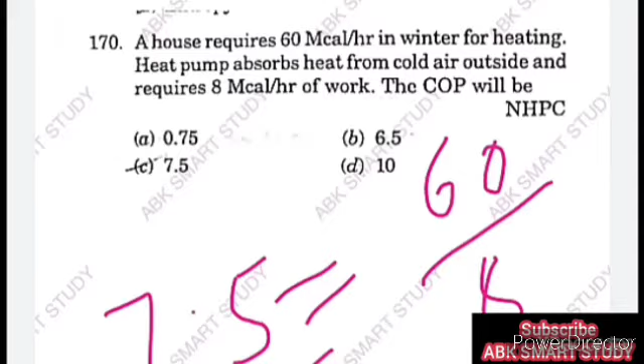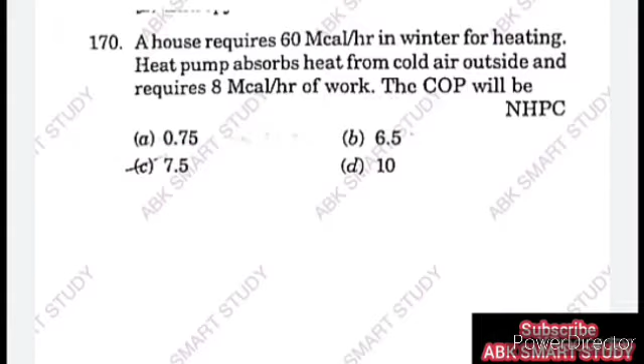So COP is equal to 60 upon 8, which is equal to 7.5. So if the heat pump absorbs heat from cold air outside and requires 8 megacalorie of work, then COP will be 7.5. So here option C, that is 7.5, is the correct answer. Next question.

Next question depends on the previous problem, that is if the house in the above problem is to be cooled and heat requirement of house is same and work to be done is also 8 megacalorie per hour, then COP will be. So this question was asked in BHEL exam. So this is an important question which depends on the previous question.

So in the previous question Q is given as 60 megacalorie per hour, but here heat requirement of house is same and work to be done is also 8 megacalorie per hour. So total heat requirement is equal to 60 minus 8, equal to 52 megacalorie. So COP will be equal to Q upon W, but here Q is 52. So 52 divided by 8 is equal to 6.5.

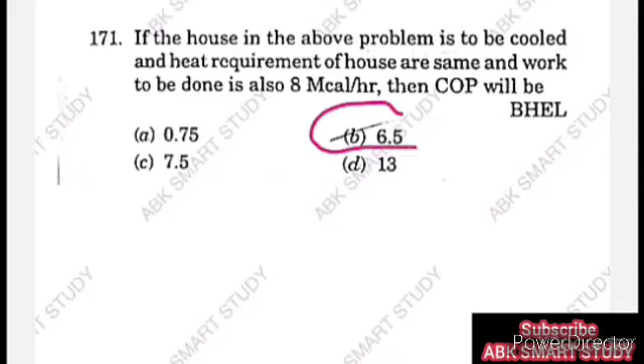So if the house in the above problem is to be cooled and heat requirement of house is same and work to be done is also 8 megacalorie per hour, then COP will be 6.5, which is given in option B. So here option B, 6.5, is the correct answer. Next question.

The equation TdS is equal to dU plus PdV can be applied to processes which are. So to which process is this equation applied? Options are A, only reversible process, option B, only irreversible process, option C, both reversible or irreversible process, and option D, none of the above.

So we know the equation TdS is equal to dU plus PdV is applied to both reversible and irreversible processes. So here option C, the equation TdS is equal to dU plus PdV is applied to reversible or irreversible process. So here option C is the correct answer. Next question.

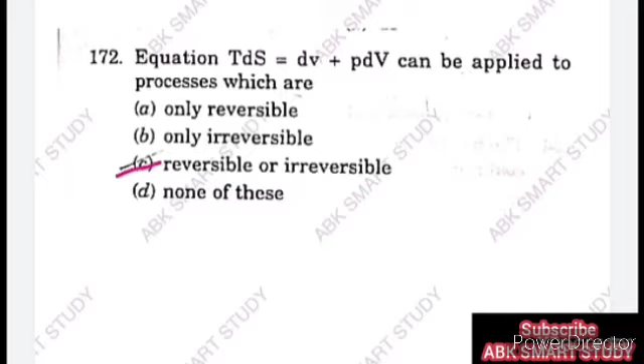So here availability function is expressed as, options are A, phi is equal to u plus p0v minus t0s, option B, phi is equal to du plus p0dv minus t0ds, option C, phi is equal to u plus p0dv plus t0ds, and option D, phi is equal to u plus p0v plus t0s.

So availability function is expressed as phi is equal to u plus p0v minus t0s, which is given in option A. So availability function is expressed in option A, that is phi is equal to u plus p0v minus t0s. So here option A is the correct answer. Next question.

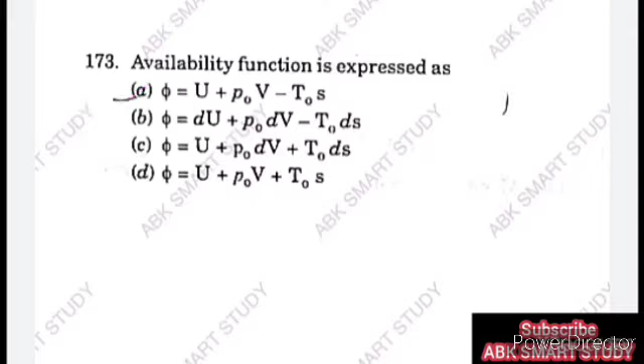Here, a triple point. So triple point means, options are: A, ice on heating becomes superheated vapor; option B, solid, liquid and vapor coexist; option C, ice occupies maximum specific volume; and option D, liquid water and dry saturated steam coexist.

So we know at triple point solid, liquid and vapor, all three coexist. So here option B, at triple point solid, liquid and vapor coexist. So option B is the correct answer. Next question.

With increase in pressure, boiling point of water. So with increase in pressure, the boiling point of water is what? Option A, increases and enthalpy of evaporation increases. Option B, increases and enthalpy of evaporation decreases. Option C, decreases and enthalpy of evaporation increases, and option D, none of the above.

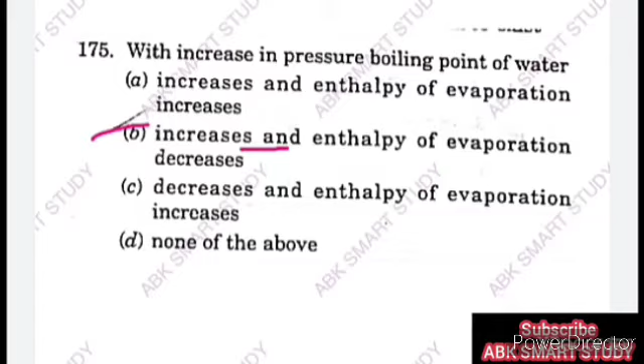So with increase in pressure, the boiling point of water increases, its temperature increases and enthalpy of evaporation decreases, which is given in option B. So option B is the correct answer: with increase in pressure, its temperature increases and enthalpy of evaporation decreases. So option B is the correct answer. Next question.

With increase in pressure for water, enthalpy of dry saturated steam. So in the previous problem water's enthalpy was given, and now here for dry saturated steam. So with increase in pressure for water, enthalpy of dry saturated steam decreases. So here option B is the correct answer, that is with increase in pressure for water, enthalpy of dry saturated steam decreases. So option B is the correct answer. Next question.

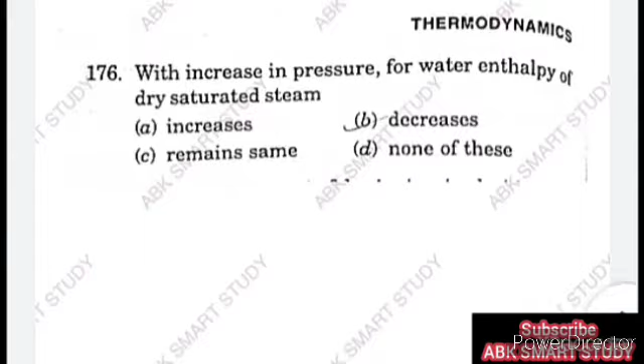If a certain amount of dry ice is mixed with the same amount of water at 80 degrees Celsius, then the final temperature of mixture will be 0 degrees Celsius. So if a certain amount of dry ice is mixed with the same amount of water at 80 degrees Celsius, then the final temperature of mixture becomes 0, which is given in option B. So here option B is the correct answer. Next question.

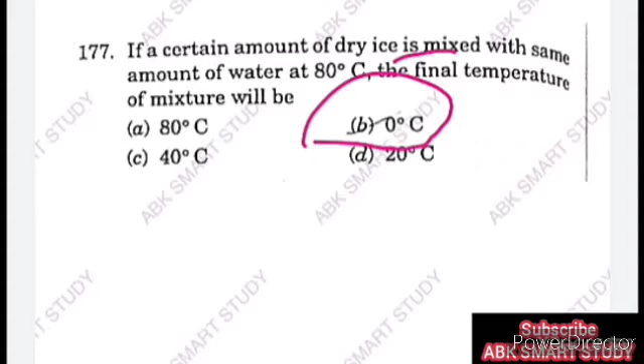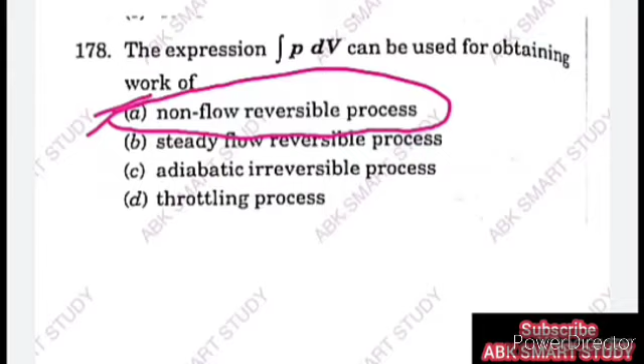So here option A, that is non-flow reversible process, is the correct answer. That is, the expression integration of P into dV can be used for obtaining work of a non-flow reversible process. So option A is the correct answer. Next question.

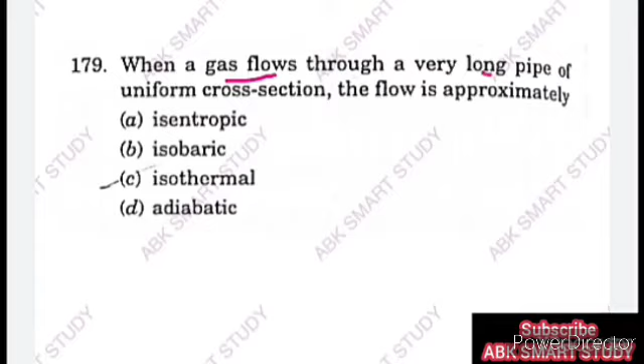When a gas flows through a very long pipe of uniform cross section, then the flow is approximately what? Option A isentropic, option B isobaric, option C isothermal, and option D adiabatic. When a gas flows through a long pipe with uniform cross section, the flow is called isothermal, that is constant temperature flow. So here option C, isothermal, is the correct answer. Next question.

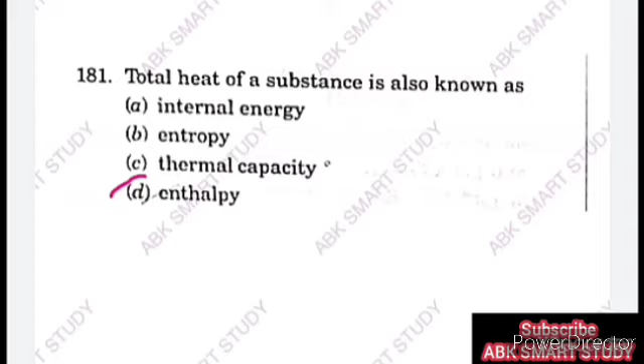The total heat of a substance is also known as: option A, internal energy; option B, entropy; option C, thermal capacity; and option D, enthalpy. So we know total heat of any substance is always equal to H, that is enthalpy, which is given in option D. So here option D is the correct answer. That is, total heat of a substance is called enthalpy. Next question.

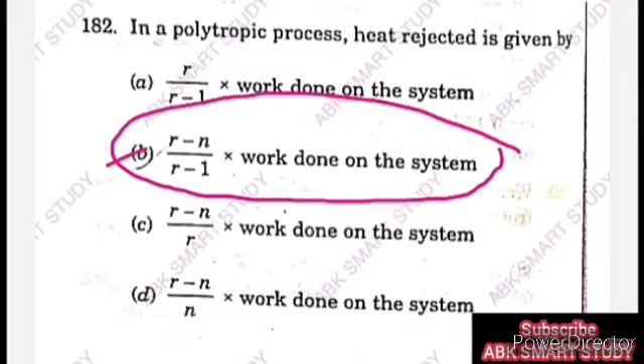So we know in a polytropic process heat rejected is given by R minus N upon R minus 1 into work done on the system, which is given in option B, that is R minus N divided by R minus 1 into work done on the system. So here option B is the correct answer. Next question.

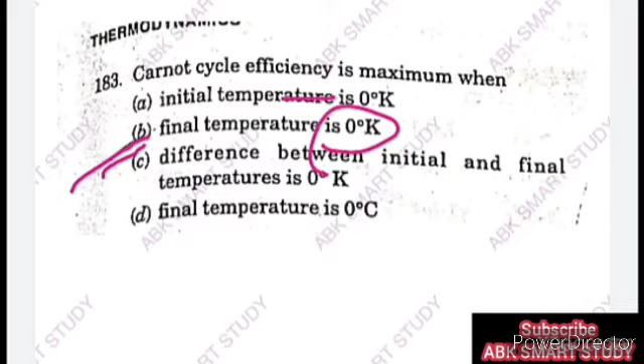So we know Carnot cycle efficiency is equal to T1 minus T2 upon T1. Here T1 is initial temperature and T2 is final temperature. When we put T2 equal to 0, efficiency is equal to T1 minus 0 upon T1, equal to 100%. That is, efficiency becomes maximum when final temperature T2 becomes 0 degree Kelvin. So here option B, final temperature is 0 degree Kelvin, is the correct answer. Next question.

So we know according to Clausius statement, heat flows from hot substance to cold substance unaided, means without the aid of any external work. Heat always flows from hot body to cold body, which the Clausius statement states. So here option B, heat flows from hot substance to cold substance unaided, is the correct answer. Next question.

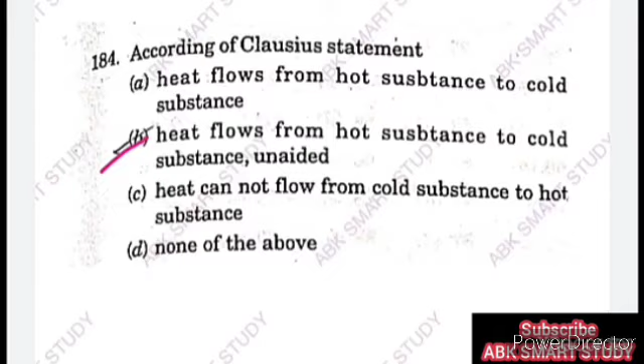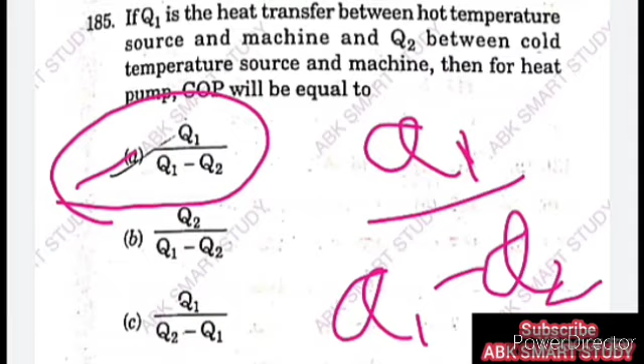So now in case of refrigeration machine, COP will be. Options are: Q2 divided by Q1 minus Q2. Option B, Q1 divided by Q1 minus Q2, is the COP of heat pump, so this is wrong. Option C is the efficiency of heat engine, so this is also wrong, and option D is also wrong.

So COP of refrigerator machine is equal to amount of heat absorbed divided by work done, given by Q2 divided by Q1 minus Q2, which is given in option A. So here option A is the correct answer. That is, Q2 divided by Q1 minus Q2 is the COP of refrigerator machine. Next question.

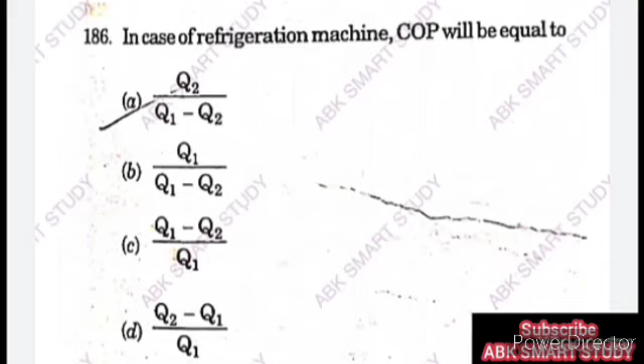Change in entropy for a heat transfer process is given by. Option A, delta H into T. Option B, delta H upon T. Option C, delta H upon delta T. And option D, T upon delta H.

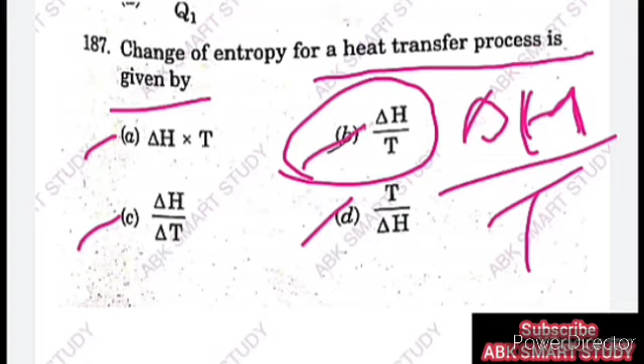So we know it is equal to delta H, that is change in enthalpy, per unit temperature, which expresses the entropy change of the process. This is given in option B, delta H upon T. So change of entropy is delta H by T, and option B is the correct answer. Next question.

A perpetual motion machine is... So what is meant by perpetual motion? Option A, it is a thermodynamic machine. Option B, it is a non-thermodynamic machine. Option C, it is a hypothetical machine. And option D, it is a hypothetical machine whose operation would violate the laws of thermodynamics.

So we know a perpetual motion machine is a hypothetical machine whose operation would violate the laws of thermodynamics. So option D: a perpetual motion machine is a hypothetical machine whose operation would violate the laws of thermodynamics. So here option D is the correct answer. Next question.

The first law of thermodynamics is the law of... Option A, the law of conservation of mass. Option B, the law of conservation of energy. Option C, the law of conservation of momentum. And option D, the law of conservation of heat.

So we know that the first law states that energy cannot be created and cannot be destroyed, but it can be transferred from one form to another. So it depends only on conservation of energy. The first law of thermodynamics is the law of conservation of energy, which is given in option B. So here option B is the correct answer. Next question.

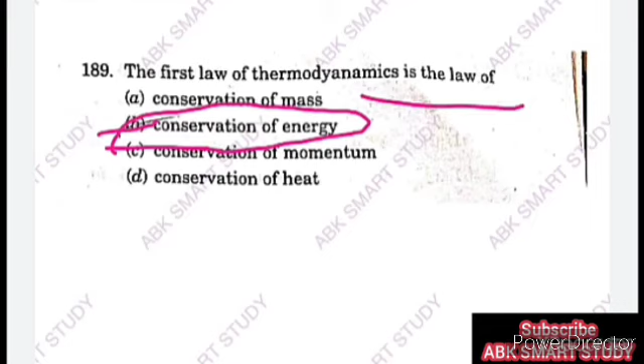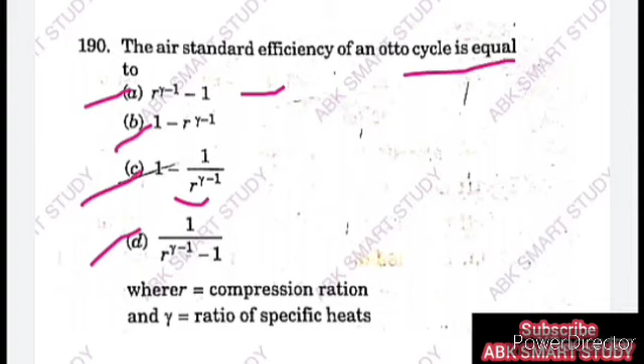The air standard efficiency of Otto cycle is equal to... Option A, R raised to gamma minus 1, minus 1. Option B, 1 minus R raised to gamma minus 1. Option C, 1 minus 1 upon R raised to gamma minus 1. And option D, 1 upon R raised to gamma minus 1, minus 1. Where R is the compression ratio and gamma is the ratio of specific heats, that is Cp upon Cv.

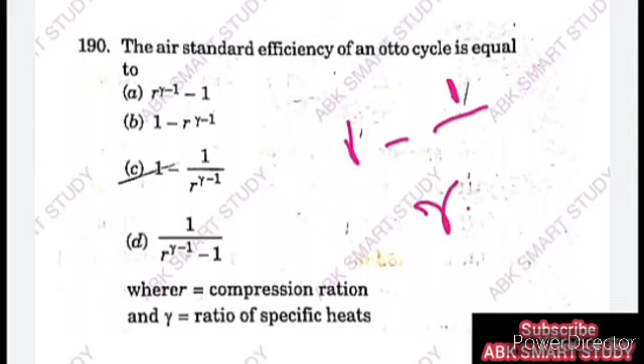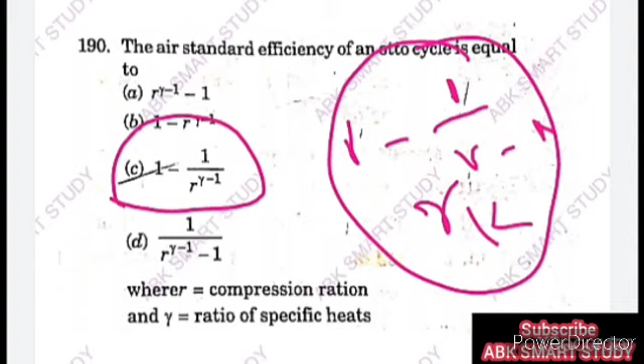So the air standard efficiency of Otto cycle is equal to 1 minus 1 upon R, the compression ratio, raised to gamma minus 1. This is given in option C, that is 1 minus 1 upon R raised to gamma minus 1. So here option C is the correct answer for Otto cycle efficiency. Next question.

Maxwell's thermodynamic relations are applicable to what? Option A, reversible process. Option B, irreversible process. Option C, mechanical system in equilibrium. And option D, chemical system in equilibrium.

So Maxwell's thermodynamic relations are applicable to chemical systems in equilibrium. They are only used for chemical systems in equilibrium. So here option D, chemical system in equilibrium, is the correct answer. Next question.

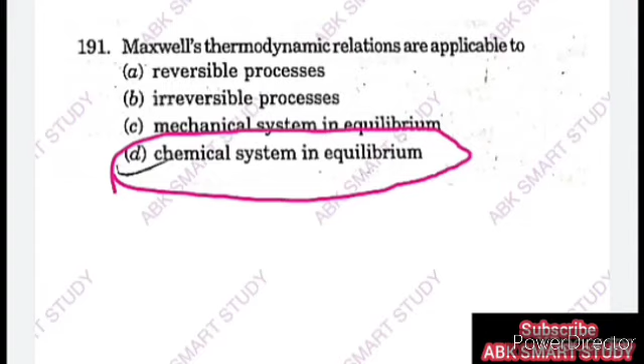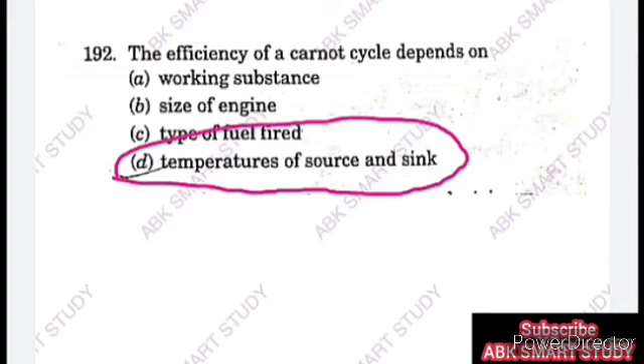So we know the Carnot cycle efficiency always depends on the temperatures of source and sink. So here option D, temperature of source and sink, is the correct answer. Next question. This is the last question of our lecture series and also of this video.

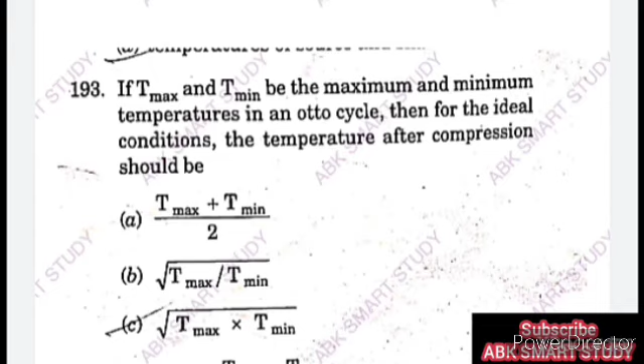So this is the last question of this lecture series and this video. Previously we studied the 7th part, and this is the 8th and last part.